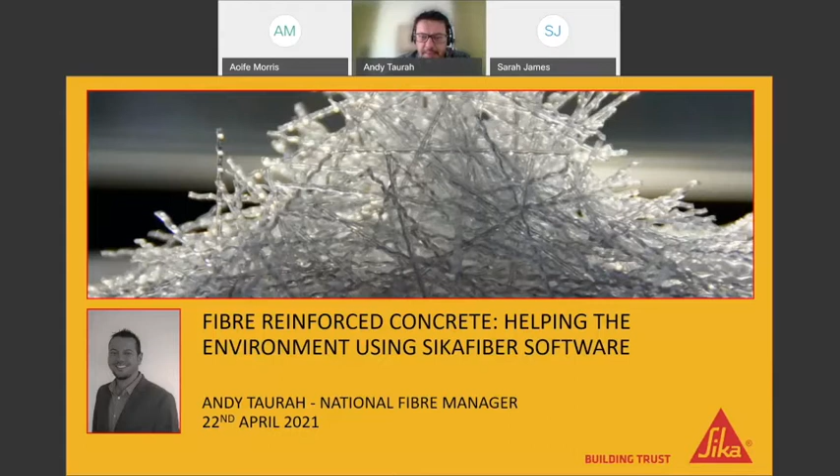Agenda for the next hour or so: a very brief intro to Sika. This has been designed for all levels of knowledge, so there may be a little bit of egg sucking involved at the start as we look at concrete reinforcement, different types that we're interested in. Then we go into the fibre reinforced concrete side, and look at the different types of fibre available in Sika's portfolio.

We look closely then into explosive spalling, which is quite a hot topic at the moment, especially with the likes of HS2 tunneling etc. There's a section on NHBC guidance just to clarify once and for all what isn't allowed on structural block and beam floor toppings in the housing industry.

There's a short section on metal decking, an area where Sika, being the experts in steel fibres, is really interested in pushing steel fibres into that market in particular.

Section on best practice - we believe it's important to get things right from early concept right through to delivery on site. And then we get into the second section, the meatier section, which is on the new SikaFiber design software. We'll get into that, see how it works, what it looks like, what it's capable of.

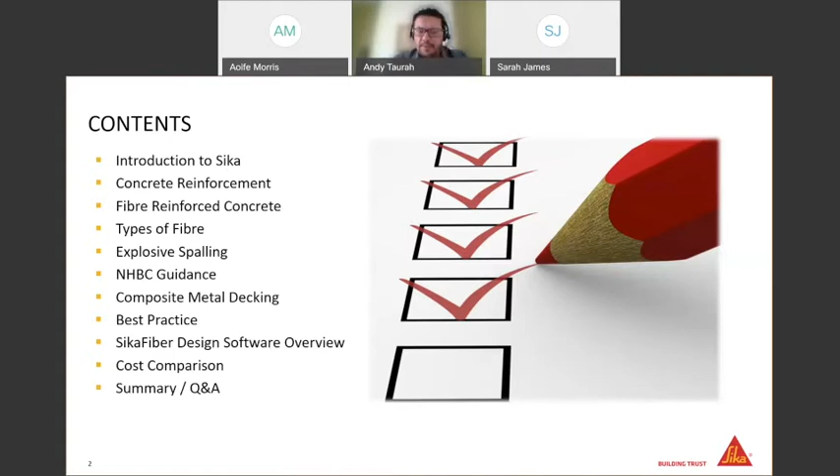There's a very quick cost comparison at the end, but it is quite the eye opener, to be fair. Then a very short summary, and as Aoife alluded to, a Q&A section to finish with.

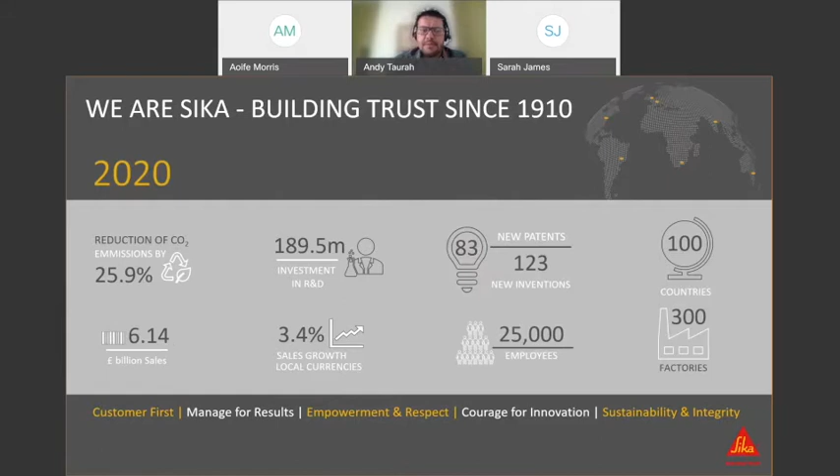So Sika as a company - global, going since 1910, so 110 years plus. 25,000 employees globally, over 6 billion in sales last year, and they continue to grow. An important figure as well, nearly 190 million spent on investment in research and development last year - very much at the forefront of technology.

In terms of the UK footprint, head office for us is down at Welwyn Garden City. We've got an R&D facility up in Preston. Over in Leeds we have the Everbuild facilities where products are manufactured for the builders merchant side of things, Sika sealants in tubes - most of us will have used or purchased a Sika product, possibly without even realizing it. We've got an office over in Dublin, and then the new lab facility that everybody is excited about up in Wishaw.

So, apologies for those fully au fait with this, but on the use of reinforcement in concrete: concrete is obviously very strong in compression, but spread that concrete load over a slab and it suddenly becomes very weak. So the all-important rebar has to be designed into concrete slabs as a tensioning device, taking care of those tensile forces.

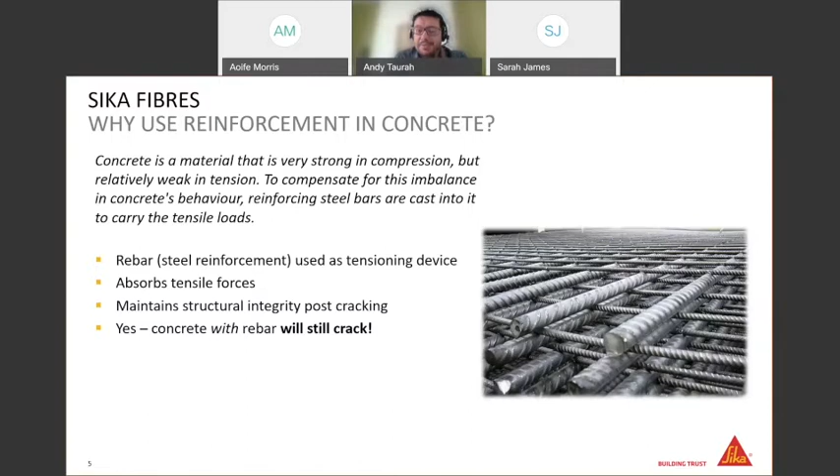Maintaining the structural integrity means leaving the slab with the ability to maintain and carry the load it's been designed to carry post cracking. The important point is that concrete with rebar will still crack. I still get plenty of comments from contractors saying 'we always use rebar because it never cracks' - the reality is that they're long gone by the time the concrete does actually crack. We're talking several months post installation.

Steel rebar itself is big and bulky - 2.5 by 5 meters near enough is the standard size of sheets delivered to site. The A grade steel mesh, the 200 mil squares, is the mesh we're interested in, from the light crack control A142, down to the heavier structural 393, which can be a 2-man lift on site. This stuff is big, heavy, and bulky to handle on site in particular.

The 'A' just means it's a square mesh, and the numbers mean the cross-sectional area of the wire. The point being, from A142 down to A393, that's where we can get involved and look at a potential fibre design.

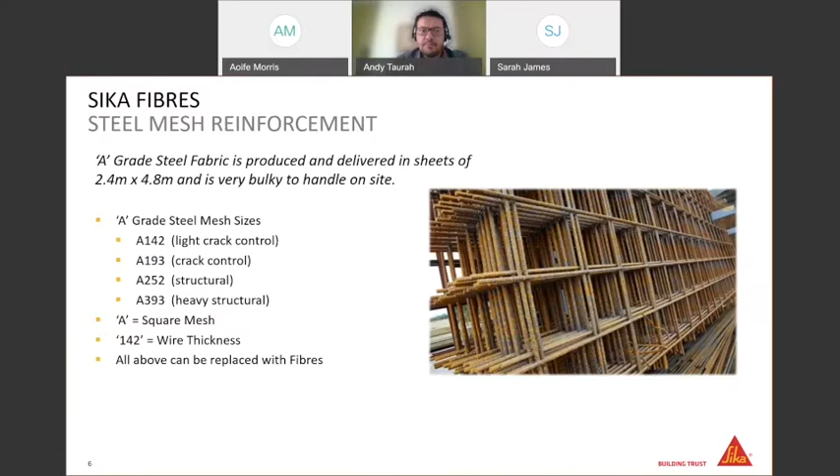Very akin to steel rebar, in that the fibres don't stop concrete from cracking, but what they will do is allow the concrete to maintain the loading that it's been designed to carry, even after the concrete's cracked.

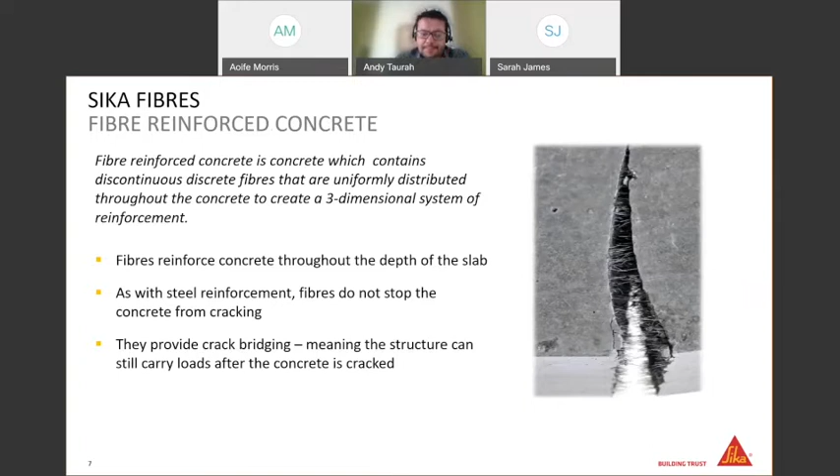Sika's fibre portfolio has grown extensively since late 2018 when Sika purchased Propex Concrete Systems. Propex were Chattanooga based, over in the US, but they were a global supplier of different types of fibres. With the acquisition of Propex, Sika has become a fully fledged fibre manufacturer and supplier.

In their portfolio, microfibres are very much run of the mill target applications - self-compacting concretes, particularly for early age shrinkage cracking. That's pretty much the role of a microfiber, other than when it's used in explosive spalling, which I'll touch on shortly. We also do a particular microfiber designed and works very well in dry sand cement screed, i.e. it doesn't ball up when it's mixed.

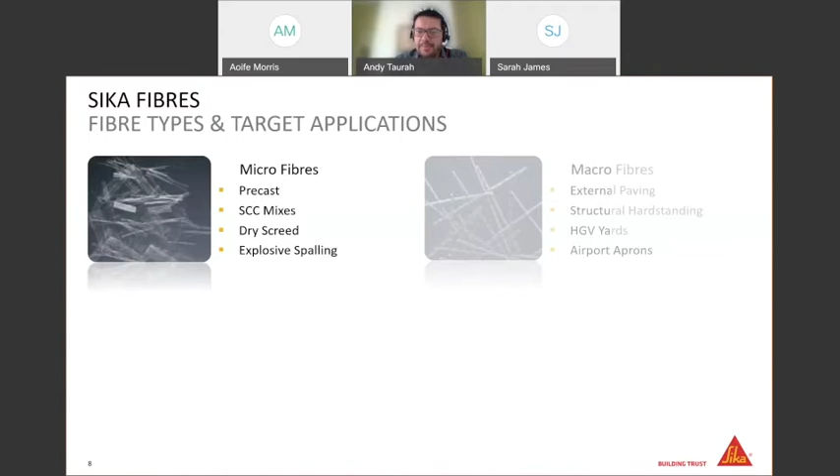On to macro fibers, the big brother really of the micro. It's still the same material, still polymer based, but we do have a macro fiber that carries a structural performance. So we can use our HPP 50 out of 4 kg per cubic meter dose, and we can demonstrate that that brings a residual strength to your concretes, particularly popular in external slabs, HGV areas, that kind of thing.

Steel fibers. Steel are and will remain for quite some time the strongest of the fiber family in terms of sheer strength. Composite metal decking - again, I'll touch on that shortly - is an area that Sika in particular feel would benefit from growth within the UK. There's an estimated somewhere around 5% of composite metal decks installed that use steel fiber instead of rebar. So there's a big target market for that.

Power float floors - power floating and steel fibers go hand in hand, particularly we obviously recommend the use of a dry shake. Appreciate there are different schools of thought on that, that's purely our guidance. Jointless flooring.

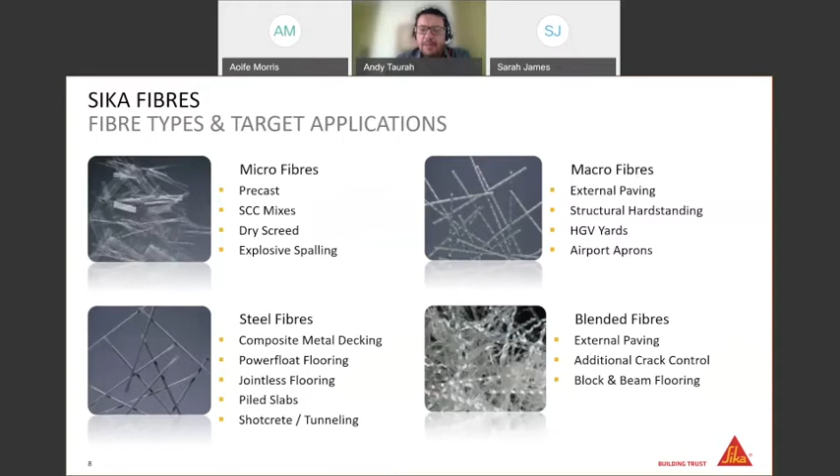Blended fibres is the last in the Sika range. We have a small number of bags of fibre where there's more than one type basically in the bag, offering more than one benefit. External paving, additional crack control. We have a great blended fibre that works very well in agricultural slabs, that kind of thing. And we have two fibres specifically designed for block and beam flooring, which again I'll touch on under the NHBC section.

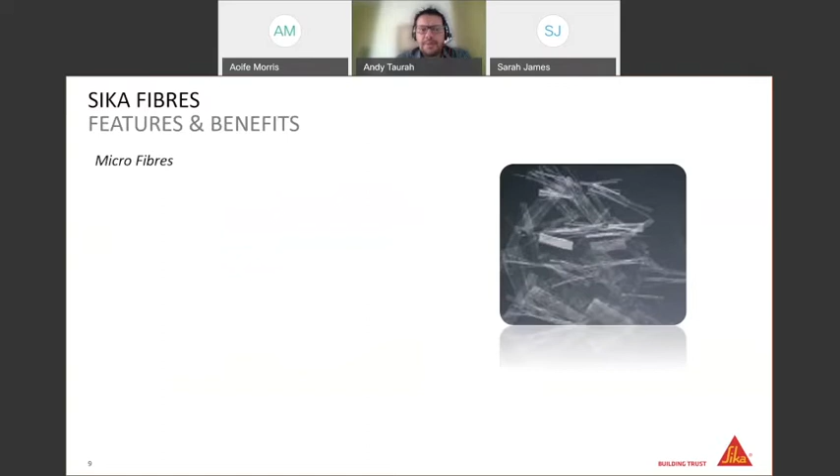So if we look a little more closely into microfibers, features and benefits - we touched on explosive spalling, there's a slide dedicated to that coming up next. The first 24 hours is pretty much the job of the microfiber. Outside of explosive spalling, microfibers will reduce settlement and bleeding, they will reduce plastic shrinkage, and as I said they work particularly well in self-compacting concrete.

Self-compacting concrete is high cement content, therefore it's high water content to allow that ready mix to flow. Obviously, the more water in the mix, the more moisture to leave the concrete, the more chance of that early age shrinkage cracking.

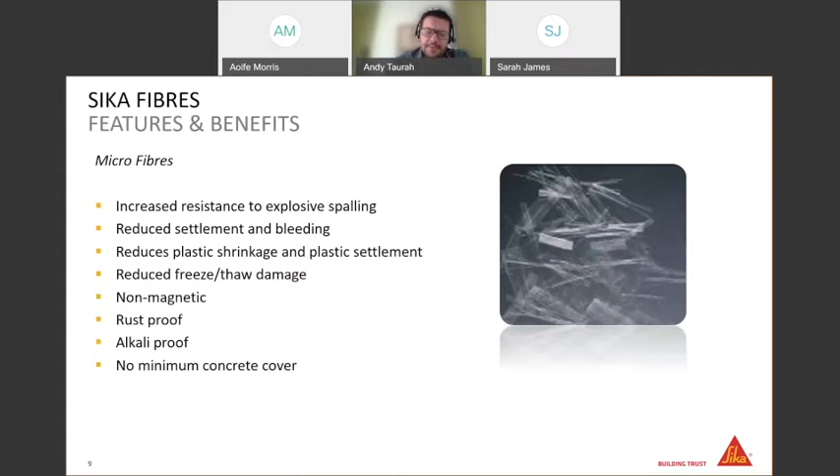Reduced freeze thaw damage - it does reduce the effect of freeze thaw damage in external paving concrete. They definitely don't, however, replace air entraining agent. They will add a small amount of air entraining effect to the concrete - that's purely based on the surfactant used to aid the mix dispersion, but they definitely don't replace air entraining agents. They're non-magnetic, rust and alkali proof, and obviously it's a fibre, it goes throughout the depth of the concrete - there's no minimum cover to worry about.

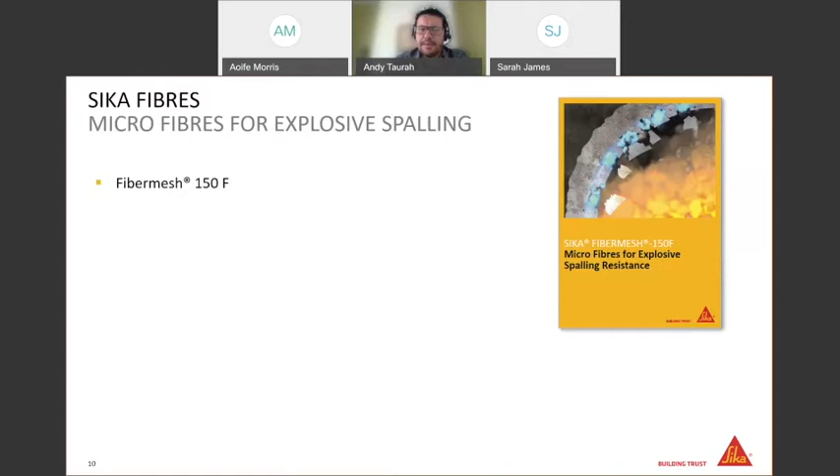So if we look a little more closely into explosive spalling, this is an area that is certainly gaining traction within the UK - HS2, London Power Tunnels, Woodsmith Mine, etc. The list is starting to grow. We have a microfiber under the Fibermesh brand 150F. This removes the risk of explosive spalling.

It's a 32 micron diameter, which we believe, as do industry experts, is the best micron diameter to use if you're looking for effective explosive spalling protection. Dosage is typically 1 to 2 kgs per cubic meter. We do a range, including a single kilogram bag, and also the large 280 kg bulk bags for all the fibre dispensing machines often used on these types of projects.

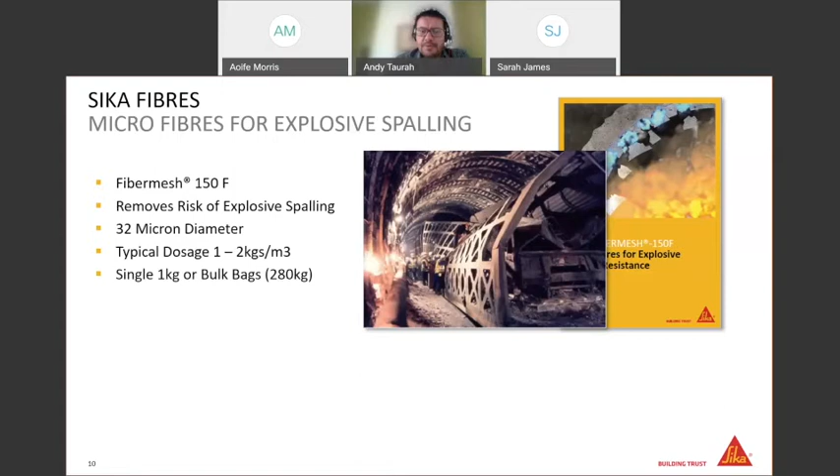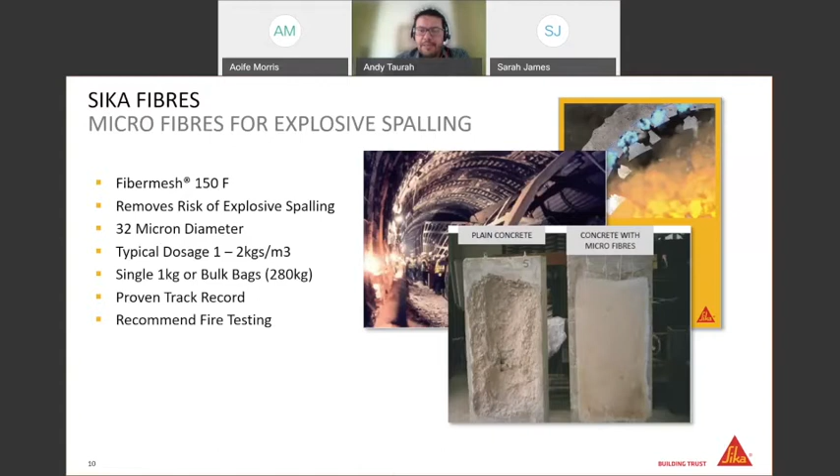We have a proven track record, and we always recommend fire testing up front. Those of you that have witnessed the effect of explosive spalling, I'm sure that memory will be ingrained for a lifetime. It is quite a scary scenario to be involved with.

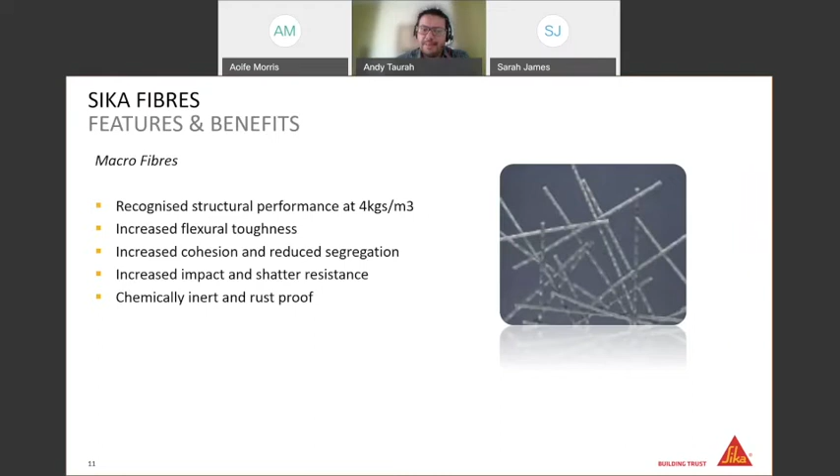They're polymer based, so they're completely chemically inert and rust proof. This makes them very popular with sea defense applications as well. So if you want rust proof reinforcement for an application, anything external, HPP 50s at 4 kilos.

If the use of a concrete pump is unavoidable, the concrete pump companies do tend to favor macro fibers as they don't put as much strain on the concrete pumps and the pipes themselves.

Obviously much safer and easier to use than traditional rebar. You've not got to carry the mesh, install the mesh, make sure it's in at the right height. Several gangs I've seen on site where it's just a complete trip hazard walking over steel mesh whilst trying to hold on to a concrete pump.

And yeah, obviously the ultimate goal for us is to remove that need for the steel mesh.

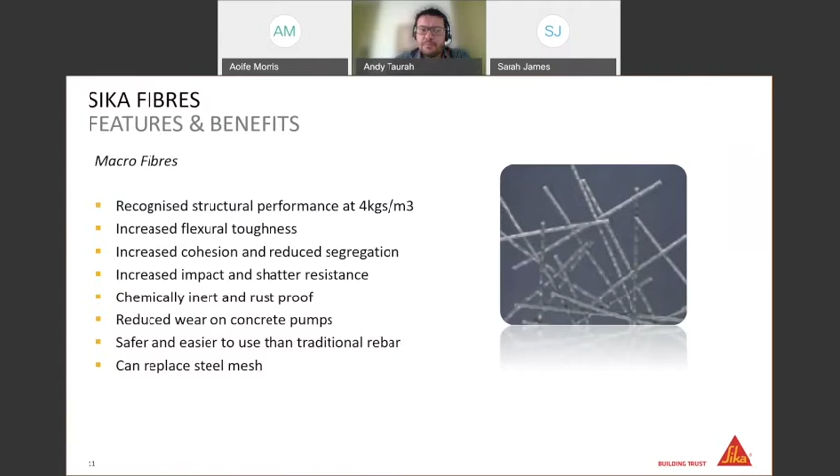With regards to the NHBC guidance, in a former life I actually worked for Propex Concrete Systems, and I was there when the NHBC issued a statement saying microfibers would no longer be recognized as viable reinforcement on structural toppings for block and beam floors. Now, what the industry took from that was that microfibers were banned, which wasn't actually what the NHBC was saying.

They were saying you can use microfiber, but you have to use something else as well. And that created quite a bit of confusion for a number of years until it was finally bottomed out in January 2018. So the blocks used on block and beam floor - and we're just talking about block and beam floors on housing here.

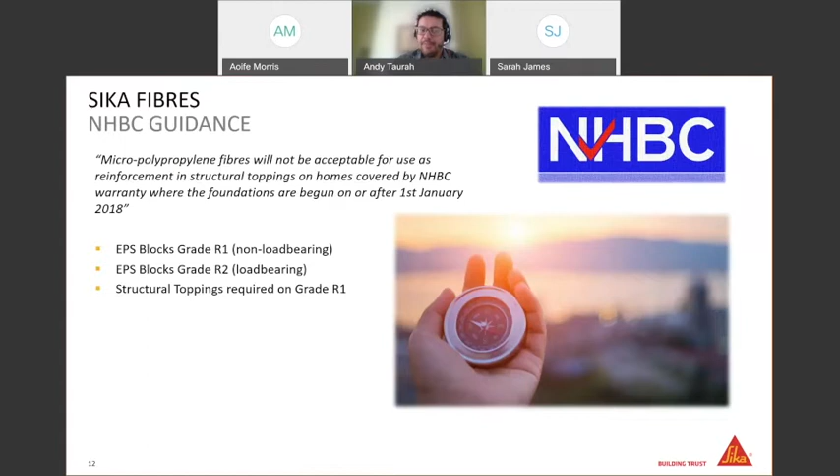So the blocks used were divided into two grades, non-load bearing and load bearing. And the guidance is that a structural topping is required if the blocks are non-load bearing. A giveaway sign is when the blocks are the polystyrene type - you need a structural topping on there.

The NHBC have said you can use a layer of steel mesh. However, given that these toppings are literally 75 mil thick, there's not a lot of wriggle room in there to install a layer of mesh.

So you can use an approved steel fiber dosage or an approved macro fiber dosage, and we actually have both in our portfolio. So it usually comes down to contractor preference, but we do have a solution to suit both requirements.

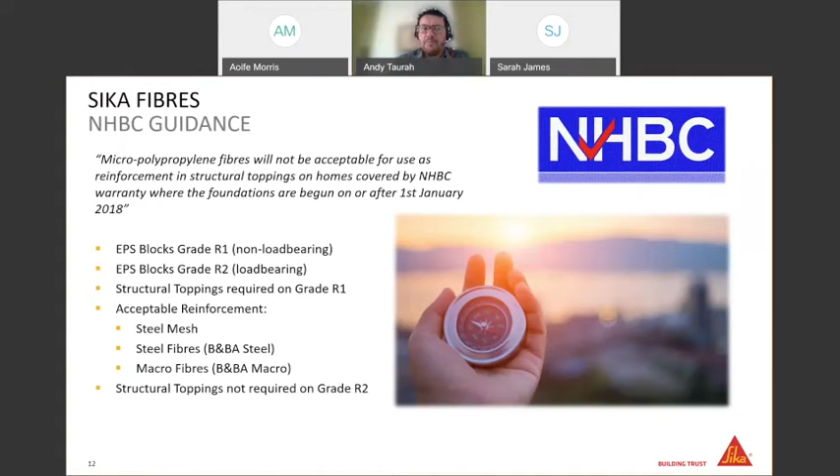And just quickly on there, a structural topping is not required if it's already a load bearing block. So hopefully that clears up the block and beam scenario.

Steel fibers - touched on this earlier. They bring an ultimate shear strength and impact resistance to the concrete, as well as abrasion resistance, which is quite important.

As a loose rule of thumb, we tend to favour the macro products for external use and steel fibres for internal, basically because the macros are rust proof.

However, there are instances - scrap yards, for example - where it's a great application for steel fibres. They will improve the surface life of the concrete because of the abrasion resistance.

You won't get that from steel mesh because obviously the steel mesh has got 50 mil or so cover on there. There is a very real opportunity to increase the loading capacity using a steel fiber dosage.

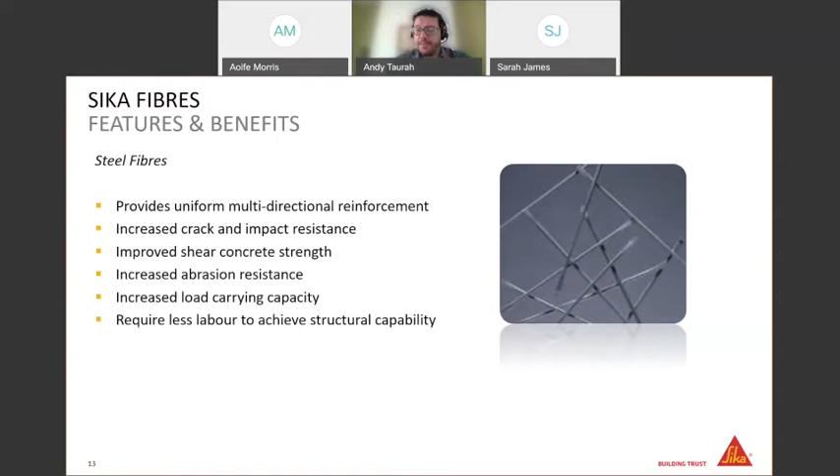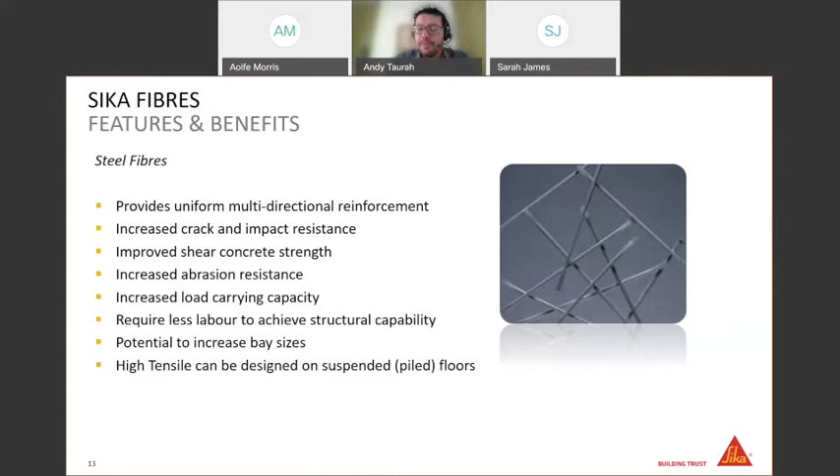Also, the important note on there is the potential to increase bay sizes. Now, we'll touch on this in the fiber software section, but it is possible to use the steel fibers and design slabs beyond the traditional sort of 6 by 6 or 8 by 8 meters. And we have a high tensile steel fiber that we put forward for design on suspended floors.

Metal decking is an area Sika believe should be taking more advantage of, particularly using steel fiber. If you think of the general areas where composite metal decking is used, they tend to be city centre builds, and city centre builds tend to have very small site footprints, so getting a flatbed wagon in there with these 2.5 by 5 meter sheets of steel mesh is getting increasingly more difficult.

So a steel fiber concrete for metal decking isn't just about steel fiber versus traditional mesh in a cost sense. It's a very real installation buildability approach, and becoming more of a health and safety issue.

So back in the day, Propex conducted fire testing with two decking manufacturers in the UK, one being Tata, the other being CMF. Propex paid for full-scale testing on these. They constructed full-scale composite metal decks, cast them in concrete with steel fibers within the concrete, and then the fire tests were conducted.

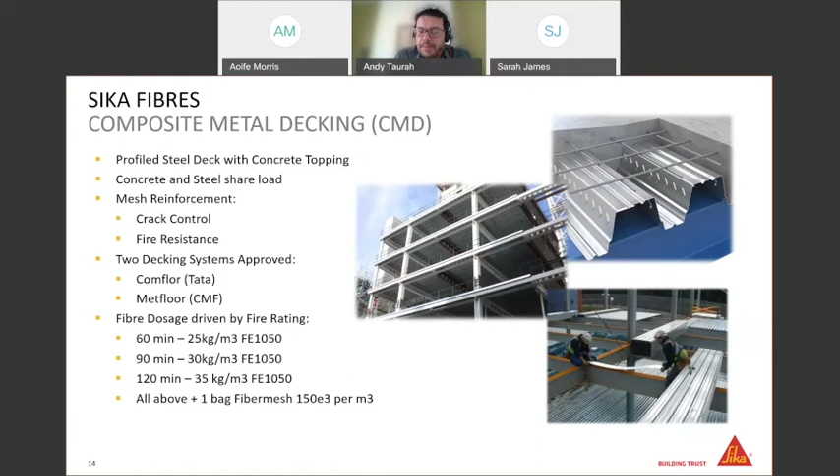Best practice. This is something very close to my heart, because I've seen and been in the situation where you've taken a tender project at a very early stage, put a value engineering solution forward for fiber reinforced concrete instead of traditional mesh, and then it gets contract awarded, gets to delivery onto site, and for whatever reason the fiber batching guidelines haven't been followed, and what arrives on site is the dreaded concrete with huge fiber balls within there. It is heartbreaking when you've done all the work early doors.

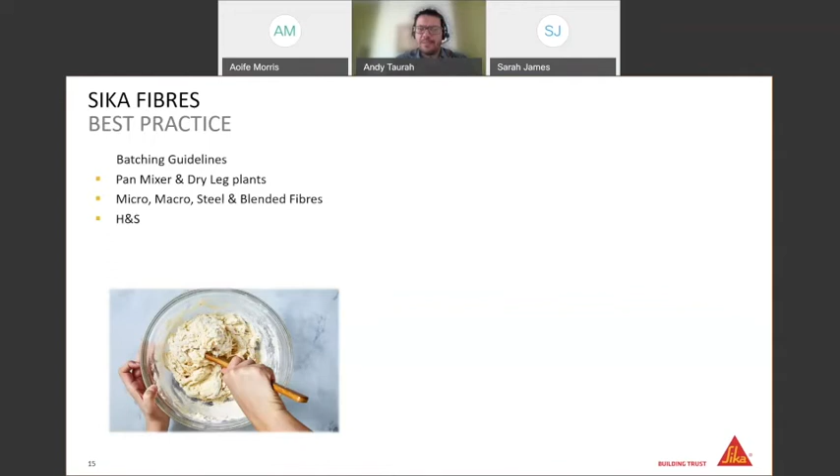So what Sika do, being the super risk averse company they are, we produce several batching guidelines based around pan mixer and dry leg plants. The batching guidelines cover every fiber in the Sika fiber portfolio. They've always got health and safety in mind - we'll always maintain that it needs to be a safe addition of the fiber product. For example, using a conveyor for the steel fibers is very key to us.

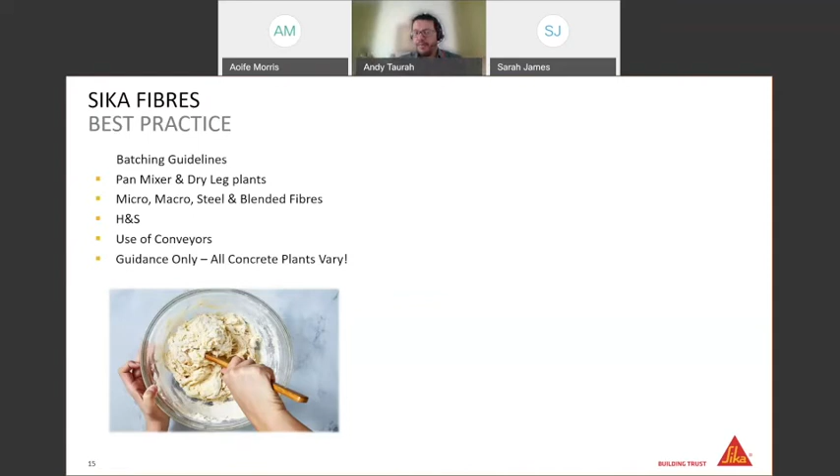They are guidance documents. Whilst it says guidance only, if the concrete manufacturer follows the batching guidelines step by step, there will be no fiber balling issues. All concrete plants vary, appreciate that, but the guidelines are there for a reason.

Similarly, and I've seen this happen all too often as well, you get everything right at the beginning, you get the concrete batch correctly, the fibers are mixed in beautifully at the plant, it arrives on site - but the floor finish responsibility does remain with the flooring contractor.

So we do provide guidance on best practice for finishing techniques with fiber reinforced concrete, and this is very important. There are obviously several flooring contractors that use fiber concrete day in, day out. There are also flooring contractors we're trying to bring on to start using fiber concrete more, and they're the ones that may require just a small amount of guidance - some simple tips and techniques the flooring contractors can use on site to minimize any fibres at the surface.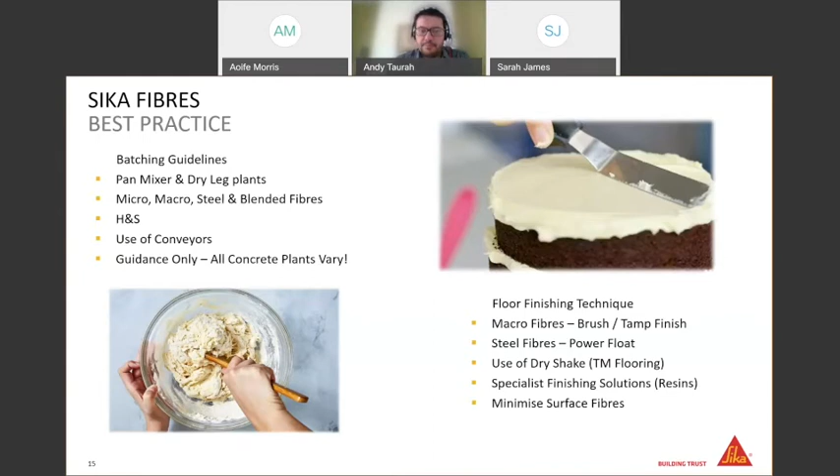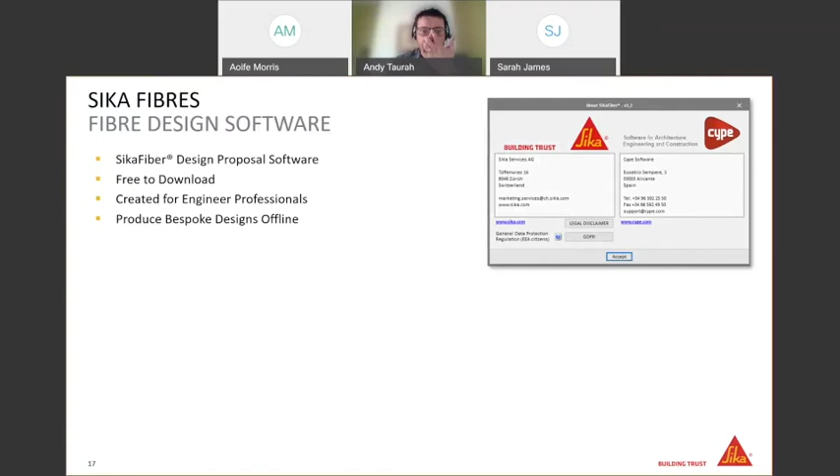So onto the Fibre software itself. This has been designed by Sika Corporate - very exciting stuff. It's completely free to download, created for engineer professionals in mind, for them or for you to produce your own designs completely offline. I'll touch on this again shortly, but it's completely designed with TR34 in mind, particularly when it comes to the safety factors. However, you have the option to go in and change those safety factors if you wish. We don't recommend it, but the system does allow you to do that.

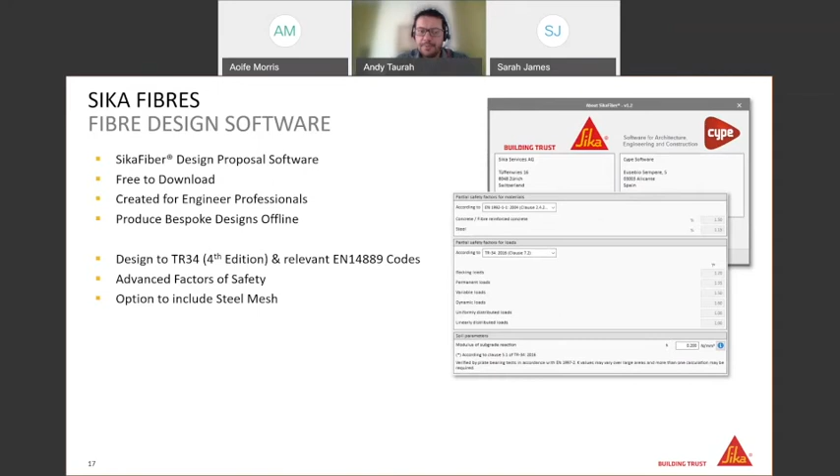It also allows you to include a layer of steel mesh. If there's any areas in particular - I've seen fibre floor designs where 95% of the slab with a fibre design is sound, and then there's just a small area, could be a mezzanine, could be a heavy point load - for whatever reason, the software will allow you to put some mesh in there just to bump that area up. It looks very pretty as well with the 3D visuals. There is an online user manual, however we do have a full separate software training online available that we can set up and deliver.

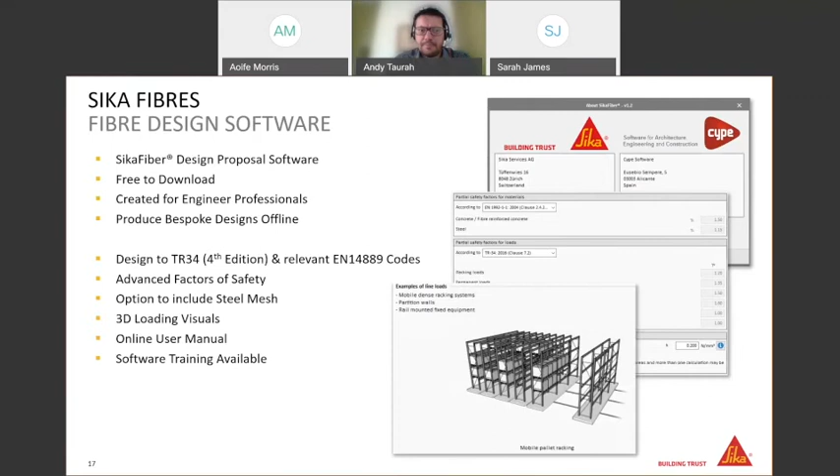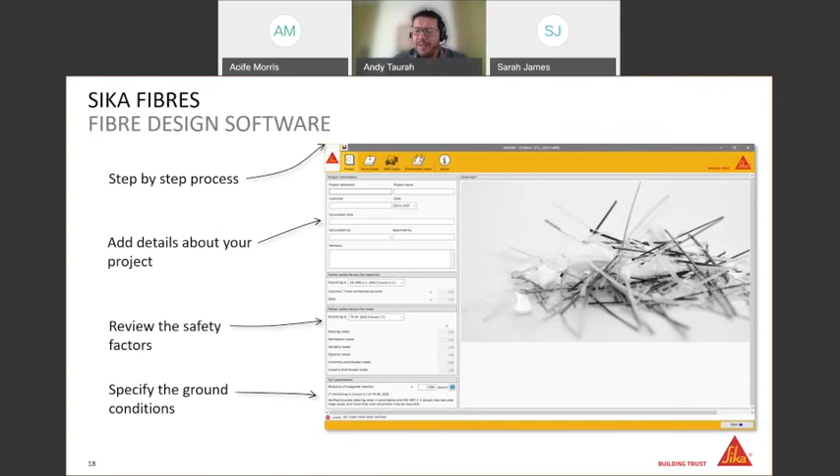So this is pretty much what the intro screen looks like. It's very straightforward, a step-by-step process. You start by adding the details about the project. As I said, you can go in and tinker about with the safety factors if you're confident enough to do so. Importantly as well, the K value, as it is known, the subgrade reaction, that needs to be input before you proceed.

The option to include multiple load cases is great. For example, with vehicle or material handling equipment, you can input the wheel data by contact area or by contact pressure. There's guidance graphics all the way through.

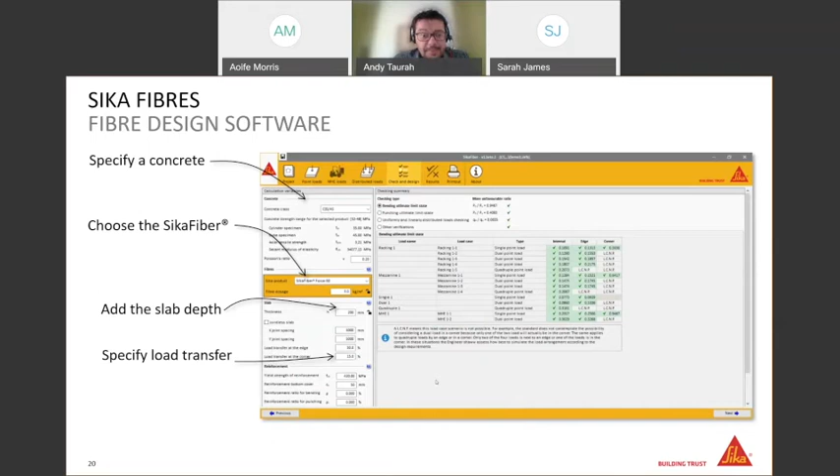Then you get to the check and design stage. The concrete type is input, C35, C40, etc. You select the SikaFiber you intend to use from the drop-down box, put in the slab depth, and specify the load transfer. That's something more advanced than the old Propex software we used to have, which didn't let you specify the load transfer at the edges and corners. There's also a section at the bottom where you can add that additional layer of rebar if required.

I'm hoping this is clear on your screens. The section on the right gives you the checking details, so anything that's failing will flag up as red. You can see there, everything's nice and ticked and green.

You also have the option of the wizard tool, which basically creates the most effective fiber design and dosage. It will lock in the fiber type you've chosen, but give you the optimal fiber dosage and slab thickness to achieve those loading details.

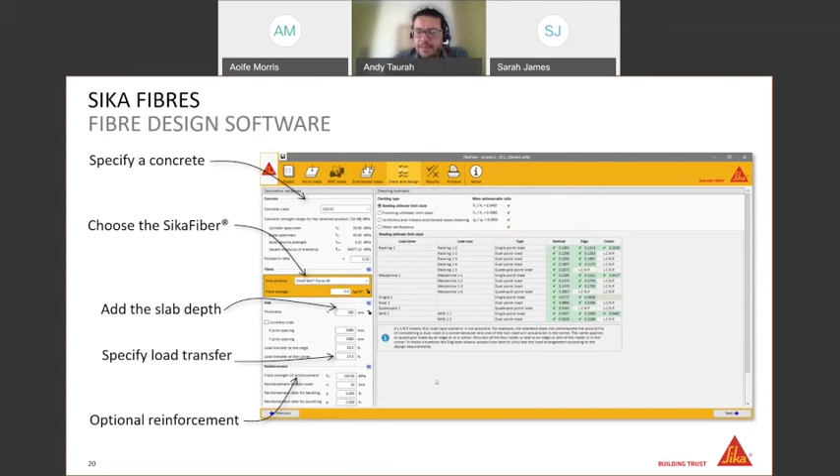Once your design's done, you can go in and view the results. Bearing in mind, this whole process takes minutes, so you have all this at your disposal and it's very, very quick to go through and generate a design.

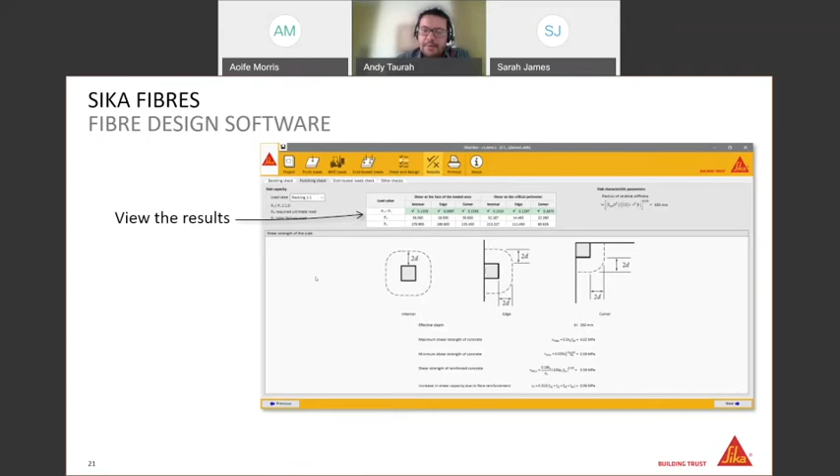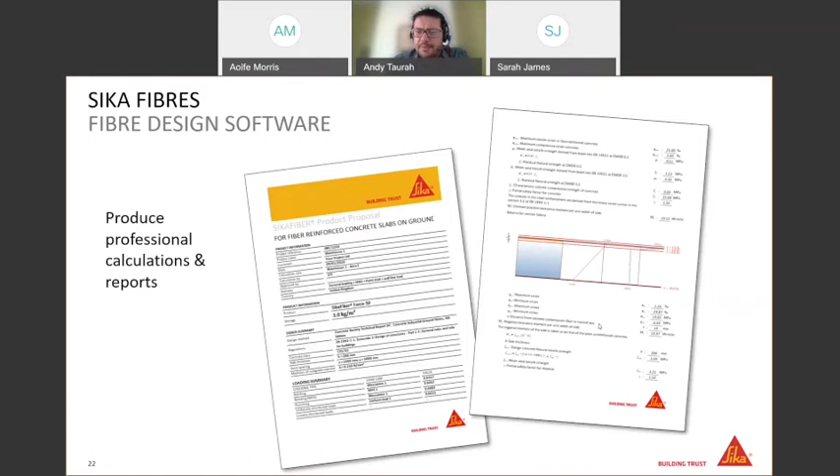The results checker is a lot more detailed than systems we've had in the past - punching checks, bending checks, UDL checks - and it's very clever. It will always check for the worst case scenario, so the whole fiber design will be based on that, and at the end it will roll out reports. You can PDF print the reports and calculations for review and distribution.

Benefits of the software: it's completely free and licensed. As I said, the calculations are done very, very quickly, almost in real time. It is very user friendly - bearing in mind I'm not an engineer, I can use the software. It's very easy to jump into and use.

It also supports multiple languages. As I said, it's been developed by Sika Corporate, so it's a global piece of software. When you sign up, you select that you're in the UK, because Sika operates in several different countries and the fiber portfolios change. So make sure you're on the UK setting, and you've got access to the full Sika UK fiber portfolio.

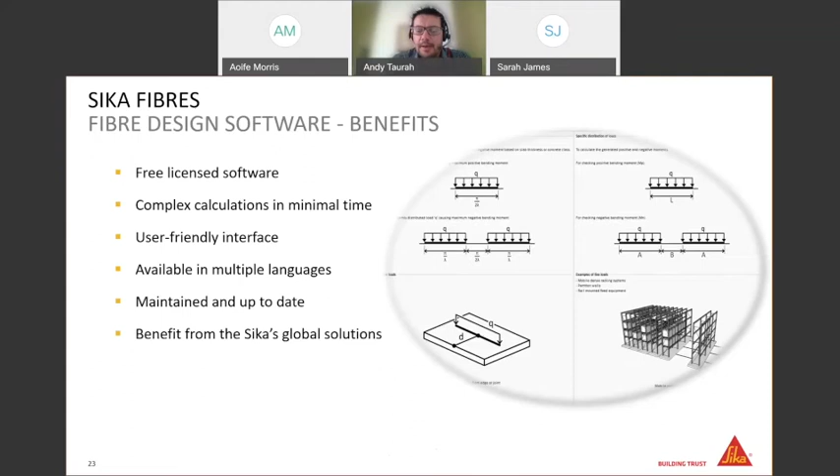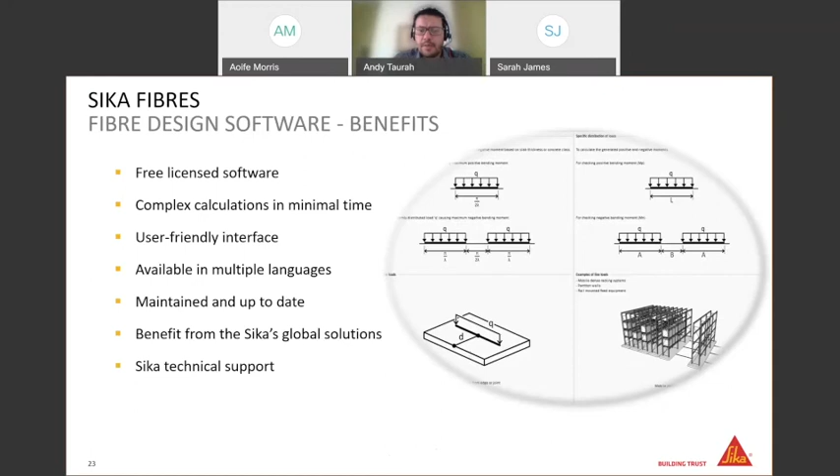Another benefit is that it will be maintained and kept up to date as things progress - as we develop new fibers and bring them on board, and as we potentially reduce our declarations of performance for particular fibers. All of that information feeds into the system, so you'll always be designing slabs with the optimum fiber dosage. You've also always got Sika's full technical support.

Just to conclude, why all the fuss to get fibers into concrete? This is a job I was involved with - I'm very pleased to say - it was actually 2019, a project up in Buxton in Derbyshire.

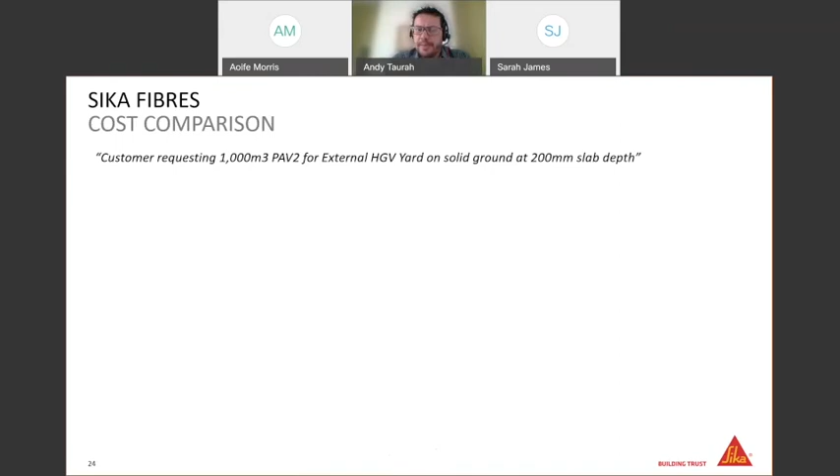I received an inquiry from a local concrete producer who was looking for 1,000 cubic meters of PAV2, just for an HGV yard. Ground conditions were solid, 200 mil slab depth. So I decided to do a bit of a cost comparison at the time. The original spec was PAV2 air-entrained, which the concrete producer was going to charge £85 per cubic meter for, based on a 200 mil slab depth, giving us a 5,000 square meter area in total.

The original spec was actually 2 layers of A393, possibly over-designed, which obviously would help our cause. At the time, that was at a cost of £3.50 per square meter. So just raw material cost: 1,000 cubic meters of concrete at £85 per cube, plus £3.50 per square meter times 5,000 times 2, because there's 2 layers, so 35 grand in A393. That's just raw material cost there, 120k, not including labour, the concrete pump, chairs, spacers, overlaps, wastage, etc. It was just a very rough calculation to get an idea.

Now, for the fibre reinforced option, the base concrete remained the same PAV2 at £85, but the concrete producer then charged an extra £25 per cubic meter just to put 4 kilos of a structural macro fibre in there.

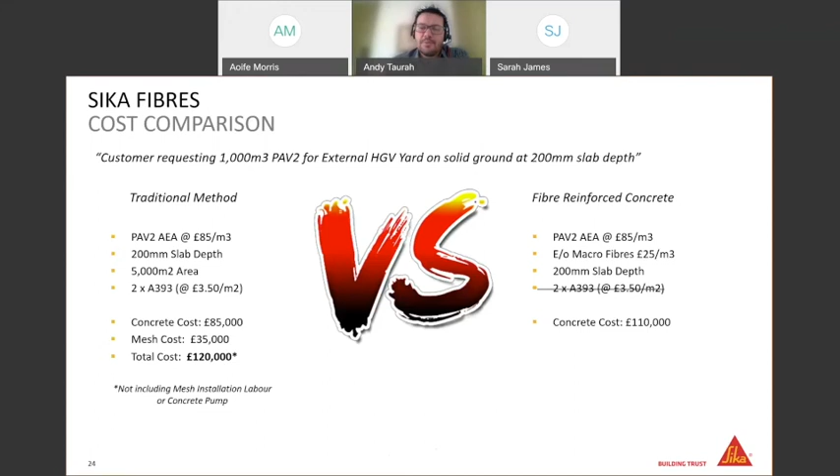The slab depth remained the same, 200 mil. However, we were able to remove the need for the 2 layers of the 393 mesh. So whilst the concrete itself had gone up to £110 per cubic meter, the mesh cost was completely removed. So just on a material basis only, there was a 10 grand saving.

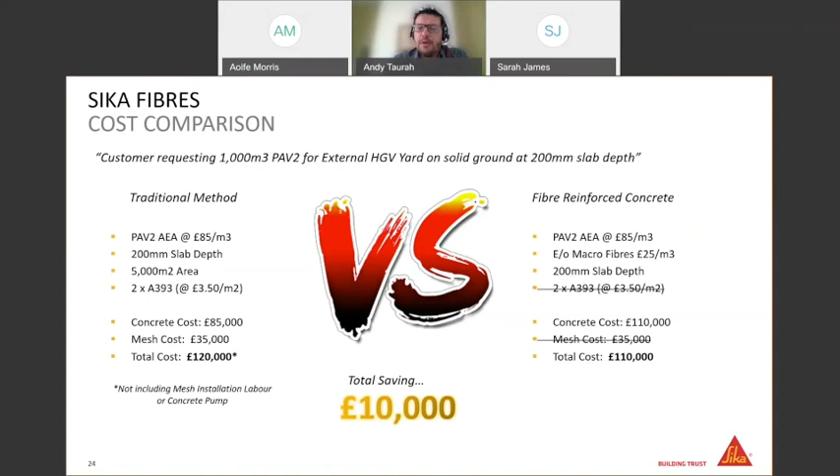Now, I can also tell you that the original program for that was 5 days at 200 cubic meters per day. The contractor managed to do it in 4 days, managing to pour 250 a day without having to use a concrete pump as well. And that's just on a 1,000 cubic meter external yard. So the potential is huge in terms of savings.

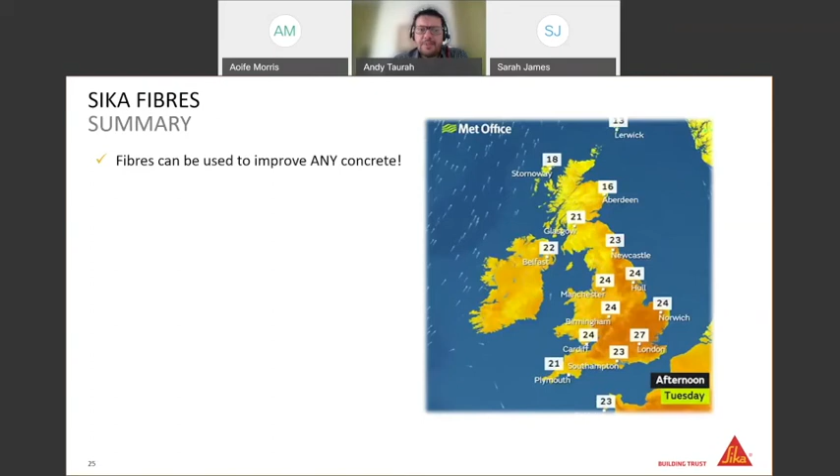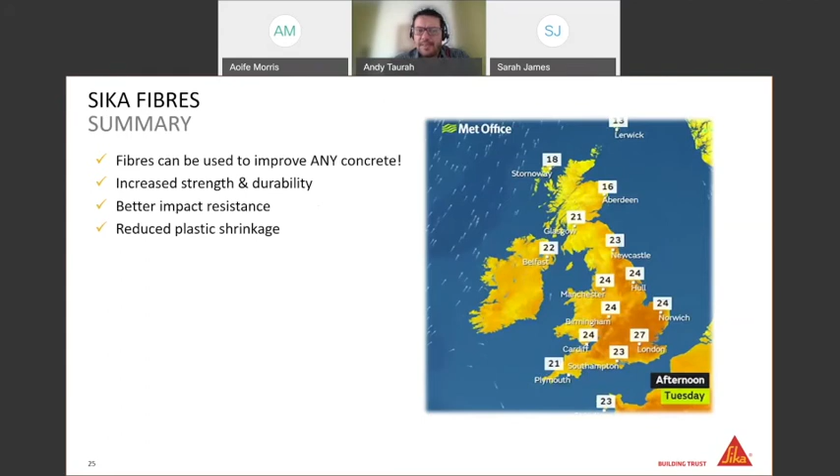So just to sum up, everyone: fibres, we will find a benefit to put fibres in any type of concrete, even if it's just microfiber for shrinkage control. Increased strength, durability, impact resistance, plastic shrinkage control. Again, as these concretes get more advanced, the contractors and developers are favouring self-compacting concretes in particular. But as I said, there is a potential for those to shrink much more than your conventional concrete, so the use of fibres in there reduces that plastic shrinkage.

We can, as we've demonstrated, remove the need for steel mesh. And Sika, having acquired Propex, are very much a fully fledged fibre manufacturer and supplier now globally. You've got the full design and technical support from Sika on hand. There is so much knowledge within Sika, there's always someone available to help.

Production training, I can't stress that enough. It's great getting all the technical side and the design done and passed, but the production is just as key. It's just as important that these concretes get batched correctly.

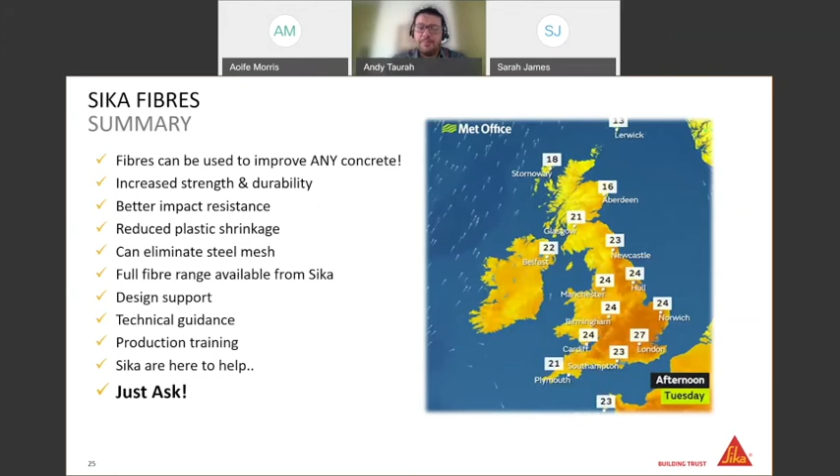As I said, Sika, we are here at your disposal. We just want to help. Please, please, please, just ask. And thank you very much, everyone.